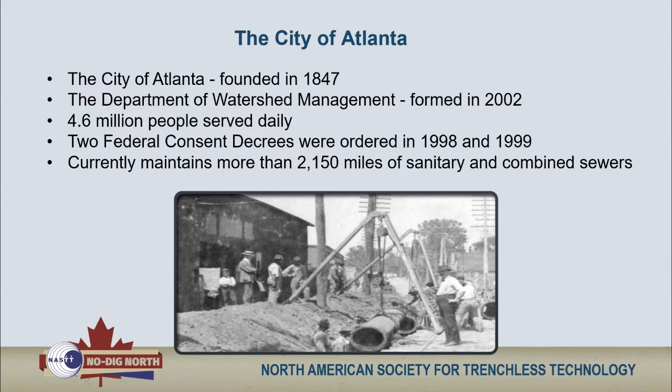In 1998 and 1999, under two federal consent decrees, the city has made great strides towards a sustainable water system through the separation of 11 miles of combined sewer in downtown Atlanta and repairing and rehabilitating over 373 miles of sewer lines, resulting in a significant citywide reduction of sewer overflows. The city currently maintains more than 2,150 miles of sanitary and combined sewers.

Based in Smyrna, Georgia, Ruby Collins was incorporated in 1970 and has been serving municipalities throughout the Southeast as a premier heavy civil general contractor. They have completed projects with contract values up to $101 million and have completed projects with the City of Atlanta totaling over $400 million.

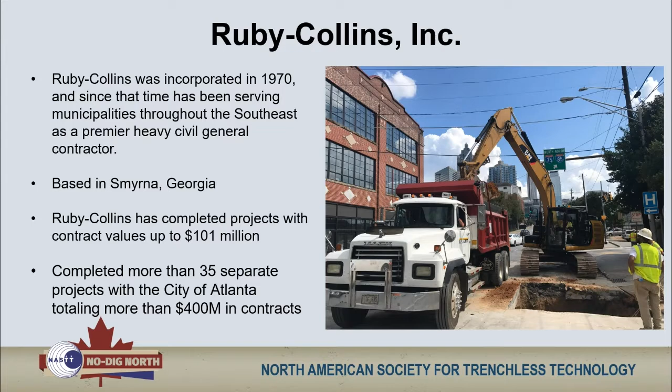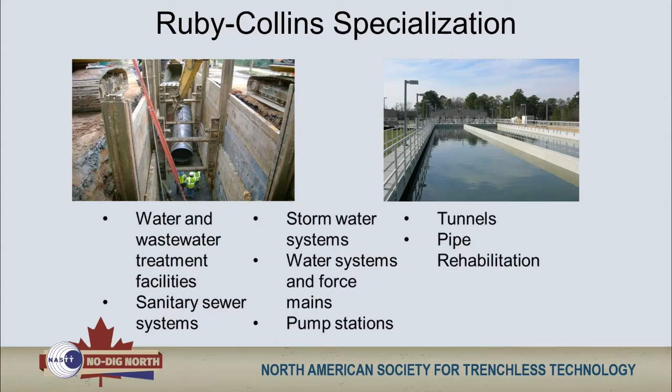Ruby Collins specializes in several construction fields, such as water and wastewater treatment facilities, sanitary sewer and storm water systems, pump stations, water systems and force mains, tunneling, and pipe rehabilitation.

Getting into the actual Peachtree Creek Rehabilitation Project, as part of the rehabilitation efforts, the city was faced with the evaluation and repair of the Peachtree Creek trunk sewer. This 90-inch arched concrete sewer was cast in place in 1937 and totaled nearly 3 miles in length, with average daily volumes of 30 MGD and peak flows of 85 MGD.

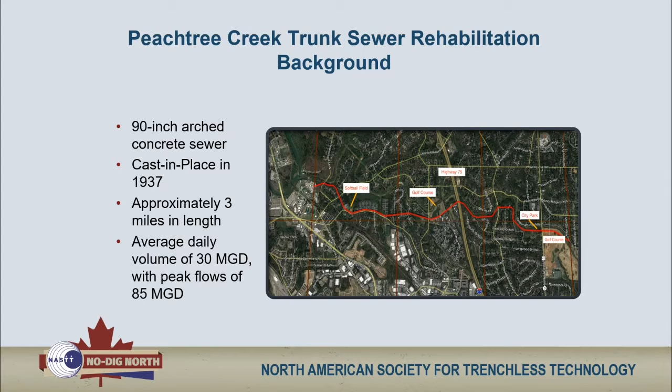The area above the sections of the sewer that needed maintenance and repair included a thriving residential area, a city park, golf courses, suburban communities, and Interstate 75, making this project the perfect candidate for a trenchless solution. As you can see by the as-built from the original construction of the cast-in-place sewer, there are several joints in the concrete that are not reinforced and are subject to movement.

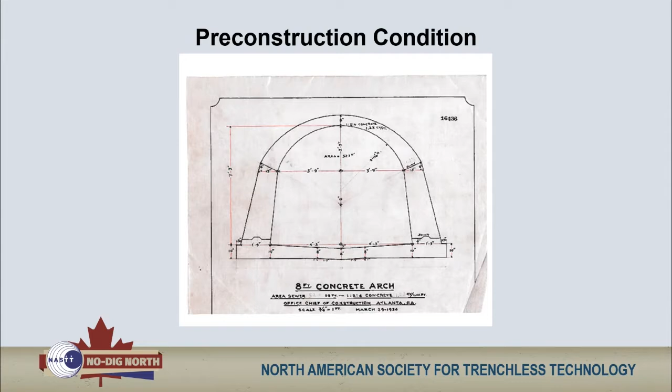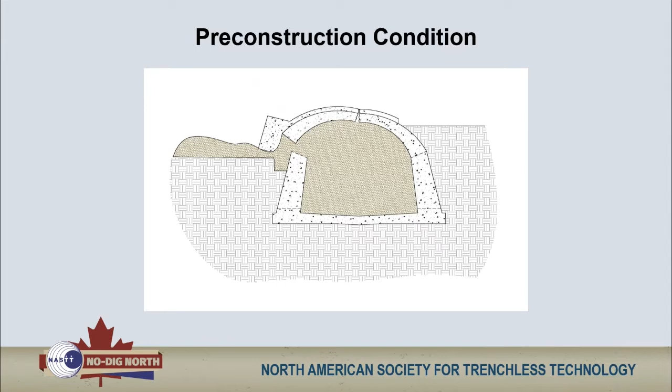The condition of the sewer was in very bad shape due to a 500-year flood event that exposed structural failures, including cracks, failures, and concrete degradation. All of this was impacting the local community environment. A combination of all these failures resulted in significant sewer spills that impacted the local community and environment.

In these pictures, you can see the degradation of the concrete, which was soft enough to peel away by hand. The picture on the right was a non-destructive test for the strength of the concrete. Because it was in such bad shape, it did not yield a strength result.

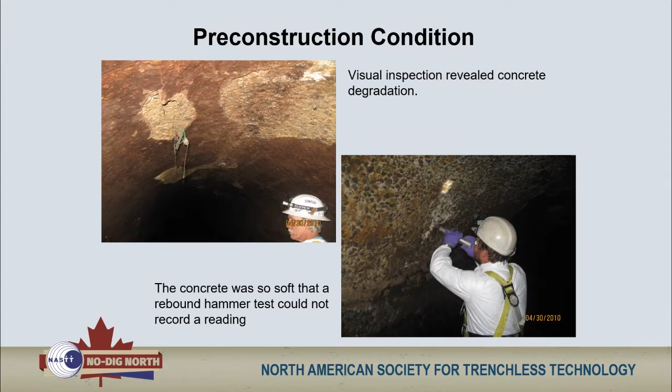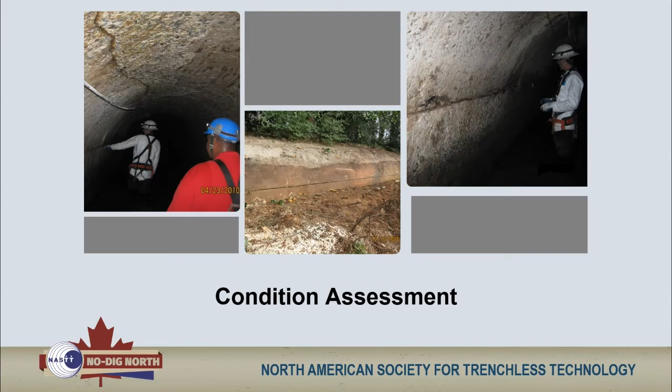CCTV, sonar, and manned entry were used for condition assessment. It revealed and confirmed the non-reinforced joints, cracks along the crown of the pipe, and general degradation of the concrete that required immediate attention to this very important asset.

Due to the location of the sewer and its surrounding areas, the cost to dig and replace the pipe, existing bends in the system, and existing flow levels in the pipe, the city and its consultants evaluated many trenchless technologies. To meet the demands of the project, spiral wound liners were chosen for the rehabilitation of the trunk sewer.

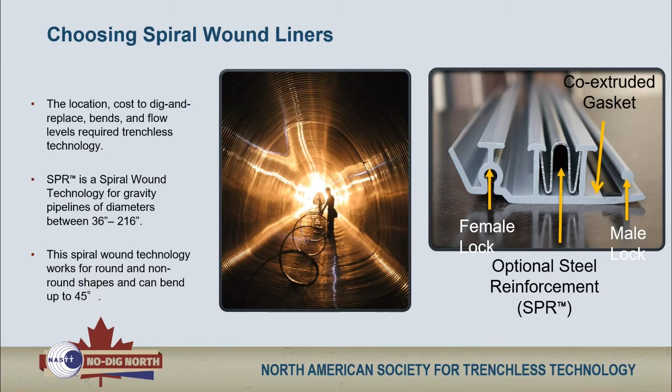With this information, the City of Atlanta made plans for a solution, creating their invitation to bid in August of 2017 for the project, and Ruby Collins received a successful award and notice to proceed in May of 2018. Ruby Collins was commissioned by the city to repair the most pressing areas of the damaged sewer immediately after the flood and design a solution for the remaining 10,500 linear feet for the community so that future issues could be addressed.

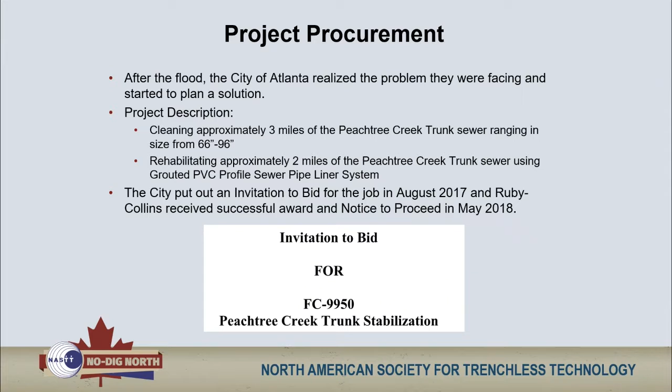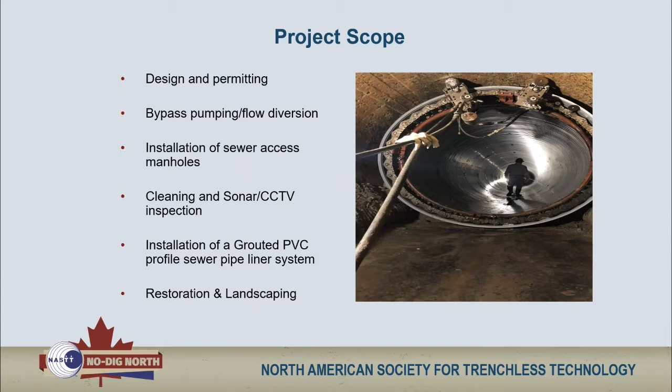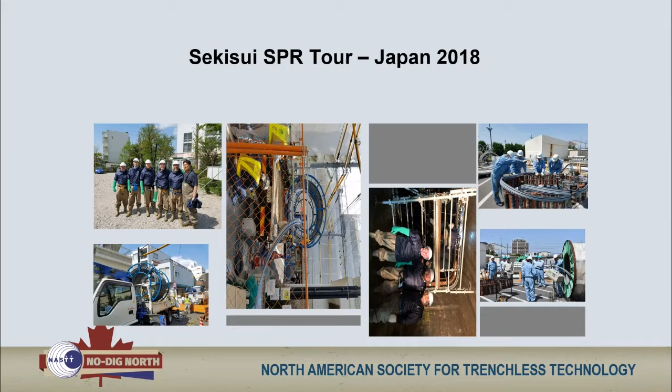The scope of the project is detailed in this slide. It also included the training of the key Ruby Collins personnel at the Sekisui SPR manufacturing and training facilities in Japan and in Ruby Collins Yard in Georgia, where additional training and demonstration of the technology for 2 test pipes were conducted. Each of these sample pipes were lined and grouted by the Ruby Collins crews.

One thing that I would point out with the picture on the right, we will talk about bypass as well as flow management considerations. One thing that was part of the lining process was to actually have 2 10-inch conduits to act as an internal bypass to bring flows down to lineable levels.

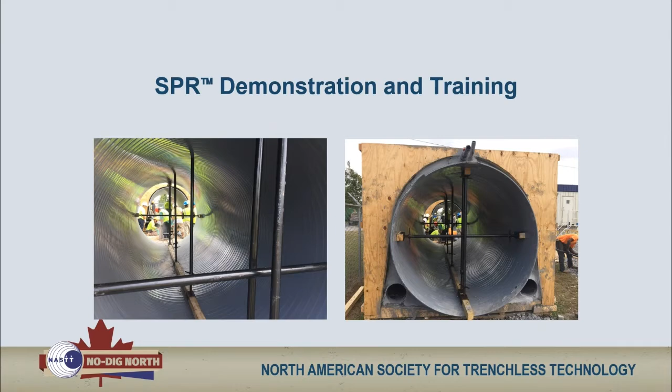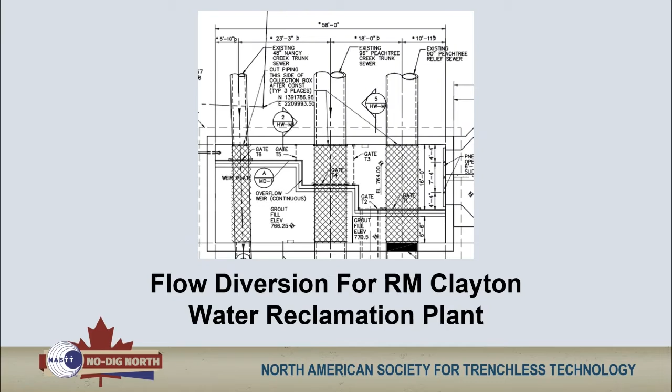As I mentioned, flow management was critical to ensure project success. This process started with the creation of a flow diversion plan at the R.M. Clayton Water Reclamation Plant. It was here where a downstream junction box containing several sewer lines came together just before the headworks at the sewer plant. This structure was utilized to dewater the sewer line to flows that would allow cleaning and lining to take place.

In some cases, the junction box surcharged due to the capacity of the headworks, causing a backwater curve up the pipeline. To alleviate this from occurring, a slide gate was installed in the junction box to prevent the water from backing into the sewer line being rehabilitated.

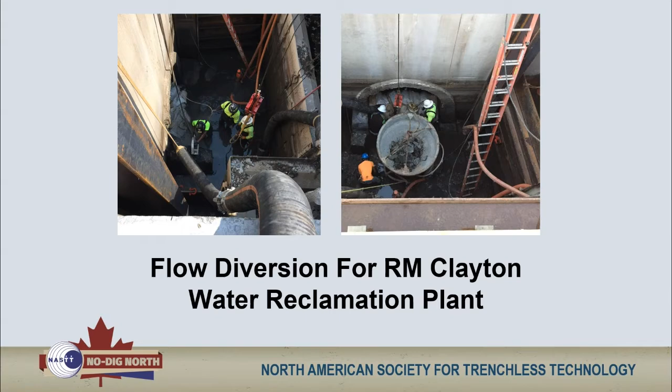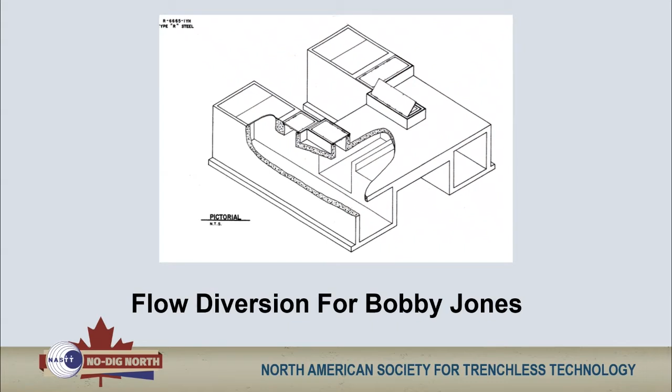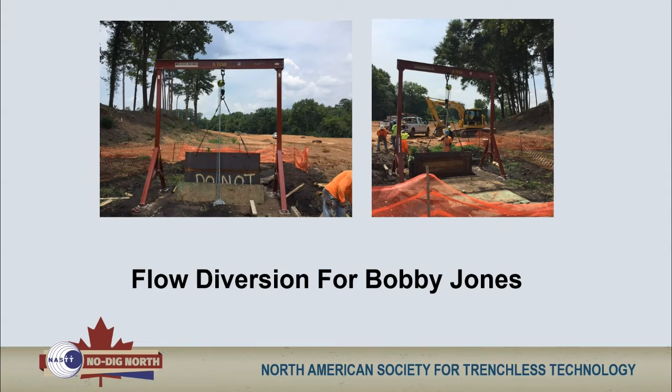This is the upstream junction box that was used to divert a large portion of the flow to a parallel sewer line. A slide gate was installed that was able to be easily inserted while working the pipe and removed when not. There were times during a very rainy season when this gate had to be lifted for periods from a couple of days to weeks at a time.

Due to the length of some of the line segments, Ruby Collins installed new manholes to minimize the distance for cleaning and lining. These new access manholes became permanent as part of the project.

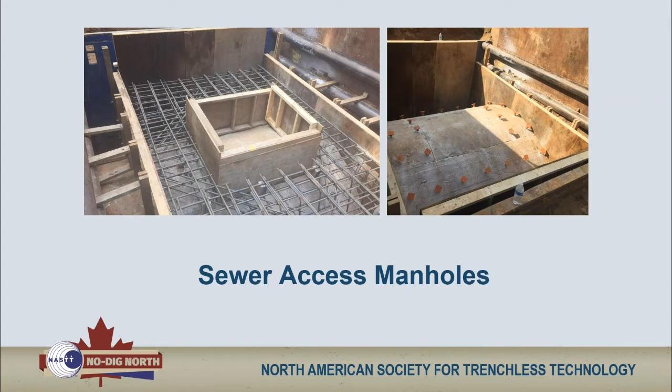With the flow management measures in place, the next step in the project was the pre-lining inspection and cleaning. Ruby Collins contracted with CES and Doetsch to complete this work, where over 15,000 linear feet of the 90-inch pipe was cleaned and inspected, along with a 54 and 60-inch siphon. Upon completion, the Ruby Collins crews moved on to the lining portion of the project.

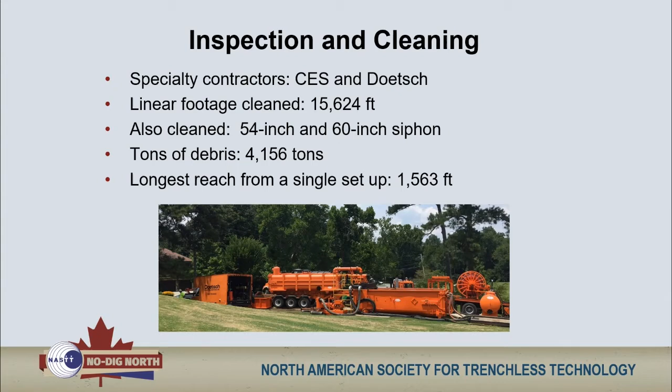Utilizing existing manholes and access points, the Ruby Collins crews were able to assemble the 82-inch PVC liner inside of the 90-inch pipe. The small crew used a continuous strip of SPR PVC fed from a spool above ground to the winding machine below to construct the fixed diameter liner. Each spool contains 500 meters of material, and once complete, a new spool was spliced to the end of the previous spool to form a fully structural, continuous pipe within a pipe.

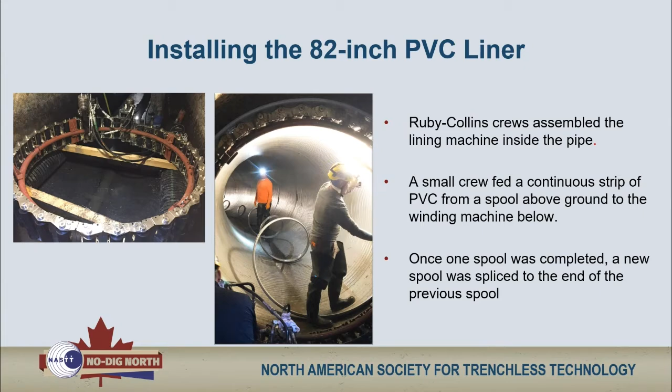The SPR winding machine mechanically locks the steel reinforced PVC strip together to form the liner. This process was continued between each line segment, with the longest segment totaling more than 1,500 linear feet between access points.

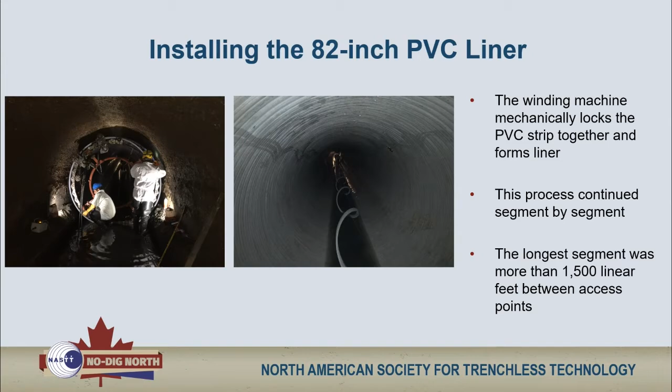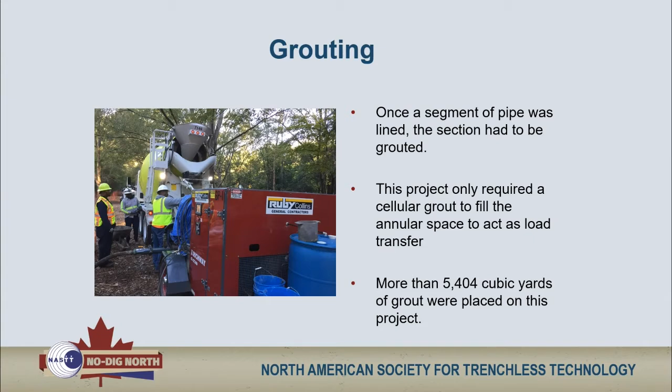Upon completion of the lining in each segment, the next step in the installation process was to grout the annular space. The liner designed for this project met the fully structural standard under ASTM F1741-18. Therefore, the project only required a cellular grout to act as a means of load transfer between the deteriorated host pipe and the new liner. More than 5,404 cubic yards of grout were placed on this project.

During grouting, a series of internal braces are installed to support the liner, while injection ports used throughout the line segment ensure that the annular space was completely grouted.

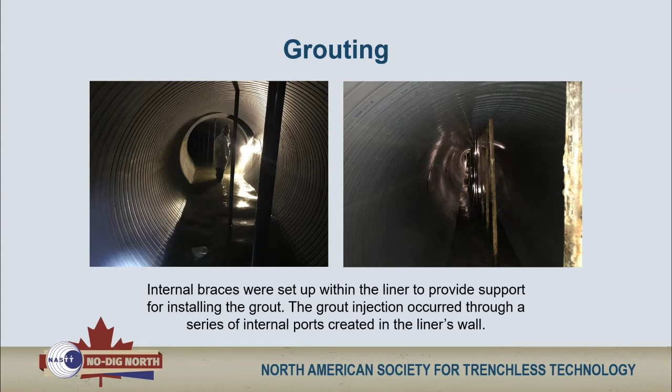As a direct result of their collective efforts, the City of Atlanta and Ruby Collins successfully completed the Peachtree Creek Trunk Stabilization Project, rehabilitating 10,500 linear feet of a 90-inch arch-type sewer. The project was completed ahead of schedule and under budget, despite some weeks of interruption due to unusually rainy weather during the construction period. This project represents the longest and largest spiral wound installation in the United States and one of the largest pipe rehab projects completed by Ruby Collins and the City of Atlanta.